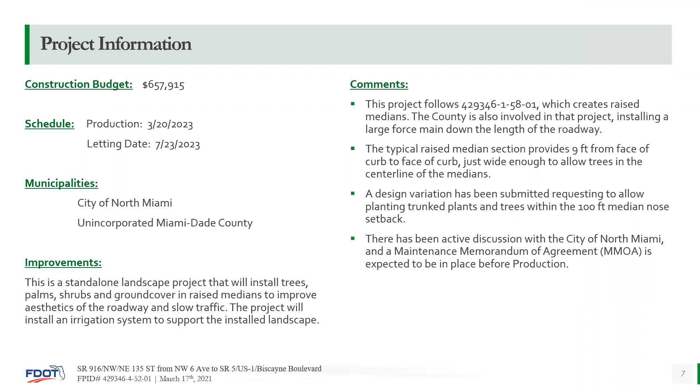The irrigation will be installed. There will be, I believe, two water taps splitting the project in half because it's about 3 miles long, but it'll be handled with one controller.

Kevin had already mentioned the force main project that's preceding this one. The median sections are only about 9 feet wide, so we won't be able to get extra large shade trees in there, but there will be medium-sized trees and palms dotting the whole project.

Typically, the standards don't allow for trees within 100 feet of the beginning of the medians. We have requested a variation from that design standard to be able to plant to the max, and that seems to be going through without any hiccups. It has not been approved yet, but there are no anticipated issues that would stop it.

As we mentioned, there is an MMOA currently in process of being executed to maintain the landscape and the irrigation. You want to go to the next slide?

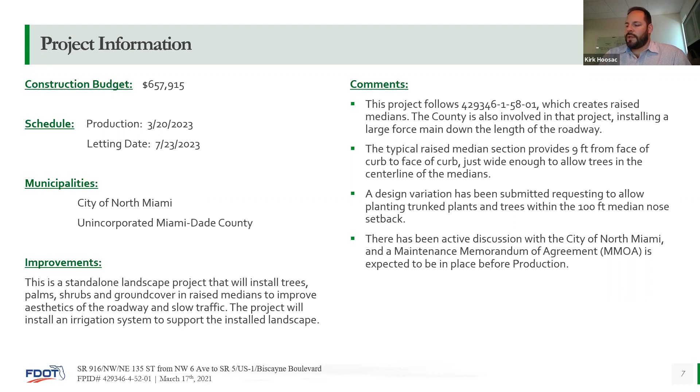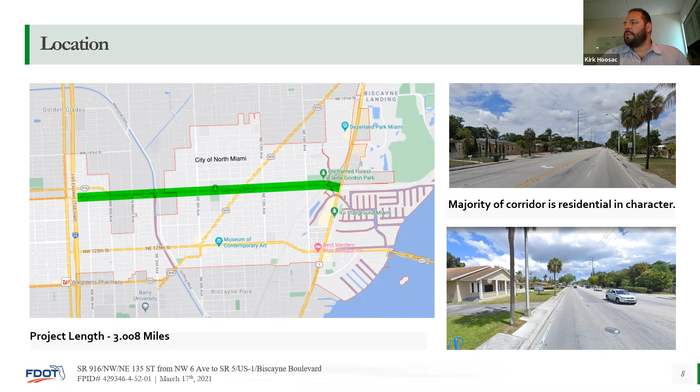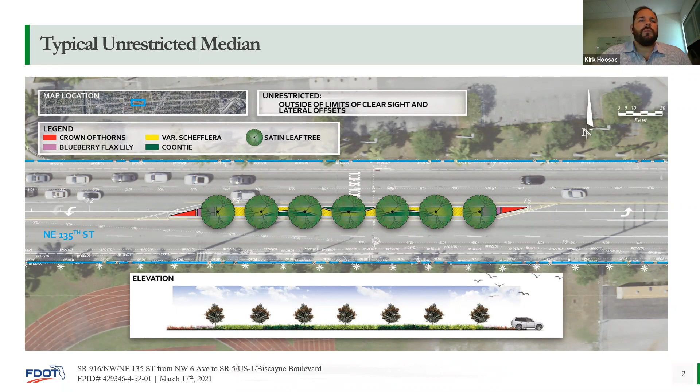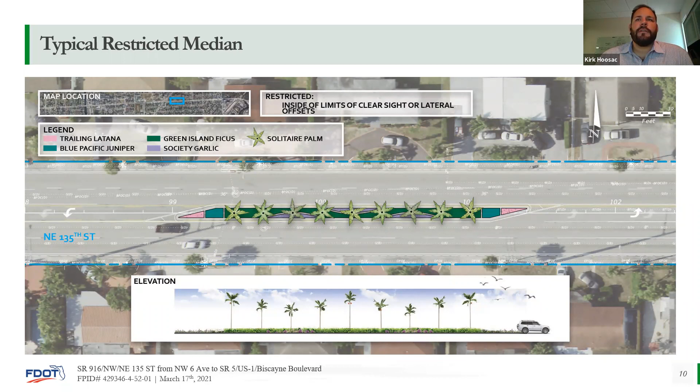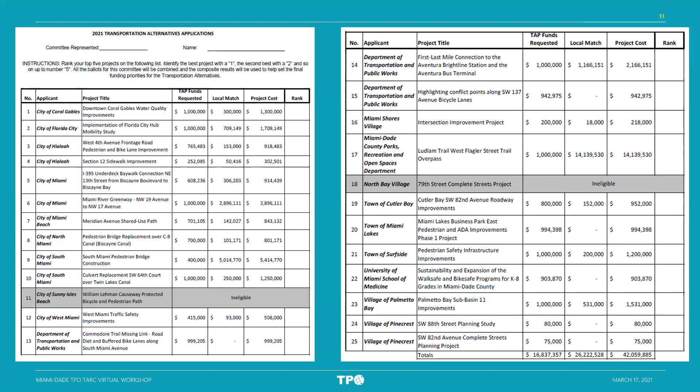So Oscar, is it in your hands, or who's handling this one? Yes, I'll go ahead and take it from here. Thank you, Alex. Okay, yeah, we received 25 applications.

I think last year we only received 12. Ironically, unfortunately though, this program is discretionary for FDOT. And as most of you are well aware, the gas taxes have gone down substantially, combined with less driving and more efficient fuel cars. Nonetheless, we have 25 applications.

Originally, 4 were deemed ineligible by FDOT. However, FHWA got involved and determined 2 of them to be re-eligible. I don't know if that's a word, I just made one up.

So what I like to do is we do this every year. As a matter of fact, last year when we did this, I think COVID had just hit, and I don't think we met in person on this one, last meeting when we did this. So we had everyone submit their rankings either by fax, by phone snapshots, or electronically.

Now that we've been in this virtual environment for some time, hopefully that's the reason why I sent it out in a spreadsheet. Unfortunately, when I sent it out earlier, it had 4 ineligible projects. I sent one out right as the meeting started that matches this on our screen. You could use either one, just in case you decide to elect one of the ones that were previously deemed ineligible - you could always write a number in the rank column in case you already had printed it out.

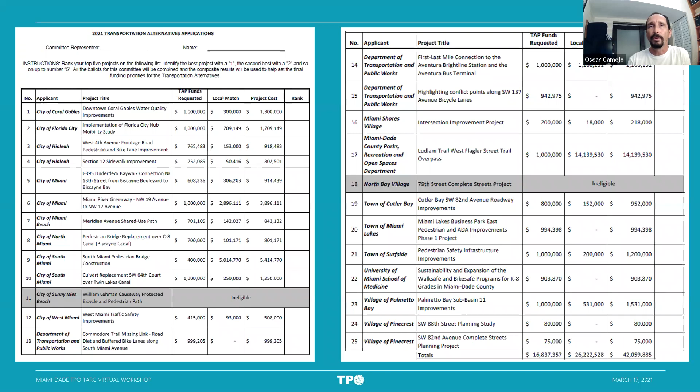Having said that, we go rank 1 through 5, 1 being the one you feel is the best, all the way through number 5. You use one number once. And we're going to go through Google Earth and go through each one of these. Getting ready for this meeting, we realized 5 of them do not have the Google Earth file set up, so we're going to go as best we can along these.

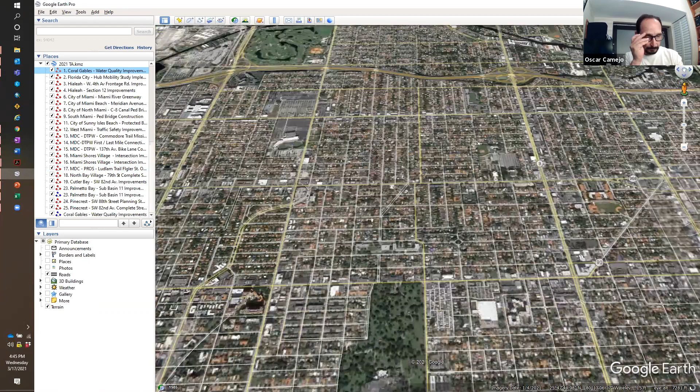So the first one is Coral Gables. They applied for what's called water quality improvements - essentially pollution prevention and abatement to waterway and Biscayne Bay as a result of roadway stormwater runoff. The existing drainage system along the corridors are part of a larger system that ultimately discharges to the Riviera waterway. So that is number 1.

What, excuse me, Oscar, why is that on this committee if it's a stormwater improvement? It's a roadway - it's a transportation alternatives application for funding, so it's not specific to an aesthetics committee or a freight committee. These are all, TARC ranks all of them regardless if they're aesthetics or not. It's part of the evaluation criteria process. But for some reason it's still eligible? Yeah, and they were deemed eligible - they submitted in time, and water quality is eligible.

Number 2 is the city of Florida City. As a matter of fact, we just completed a study for Florida City, a mobility hub study. And what they are applying for is, as a result of a study, they identified short and midterm challenges to accessibility and connectivity in the area immediately surrounding Florida City bus rapid transit system. This project will address the short-term quick fixes that can significantly enhance safe access to the station and focus on the transit core area, with priority given to improvements near schools.

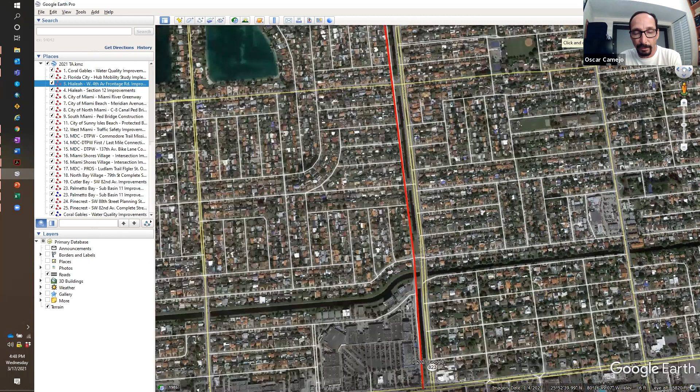West 4th Avenue frontage road pedestrian and bike lane improvement. They want to add sidewalks to the east side of West 4th Avenue along the canal and provide a bike share lane from West 49th Street to West 66th Place.

City of Hialeah has two applications. The second one is a Section 12 sidewalk improvement: add sidewalk and ADA ramps, with improvements on all corners from West 12th Avenue to West 8th Avenue and from West 32nd Street to West 37th Street. This is a sidewalk improvement effort, and they're asking for $252,000. The most you can ask for on these projects is $1 million, which most people ask for.

Applicant number 5 is City of Miami. Unfortunately we don't have that one on Google Earth. It's the I-395 underdeck Baywalk connection to Northeast 13th Street, from Biscayne Boulevard to Biscayne Bay, which connects the underdeck and Heritage Trail to the Baywalk. The City of Miami intends to expand the lease agreement with FDOT to provide the connection from the Baywalk to Northeast 13th Street. The connection will be a wide path with landscape elements to provide a safe and attractive connection to Baywalk.

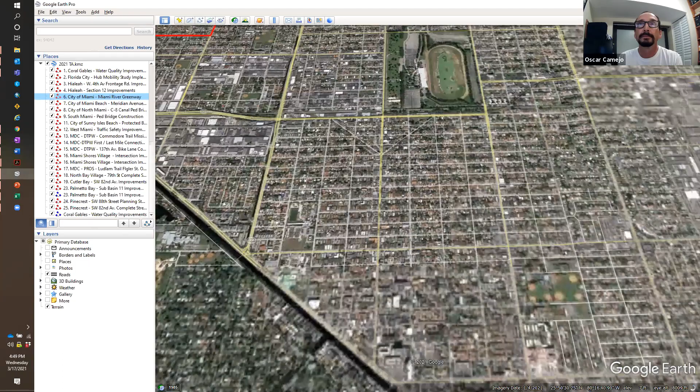Number 6 is also a City of Miami applicant. This is the Miami River Greenway, Northwest 19th Avenue to Northwest 17th Avenue, providing a publicly accessible pathway for bicyclists and pedestrians in concert with the roadway reconstruction of Northwest North River Drive. This public pedestrian and bicycle trail along the historic Miami River will connect diverse multicultural neighborhoods, public parks, residences, historical sites, businesses, and cultural attractions around the waterway. That's applicant number 6.

Now we move to applicant number 7, City of Miami Beach. This is the Meridian Avenue Shared Use Path, to enhance the bicycle and pedestrian network in Miami Beach in compliance with the adopted Bicycle Pedestrian Master Plan. The project consists of final design and construction of a 10-foot shared use path on the west side of Meridian Avenue from Dade Boulevard to 28th Street.

Applicant number 8 is City of North Miami. This is a pedestrian bridge replacement over the Biscayne Canal, replacing the existing pedestrian bridge over the South Florida Water Management District C8 Canal. The existing bridge is located between Northeast 2nd Avenue and Griffin Boulevard, approximately 1,400 feet south of the existing Northeast 135th Street vehicular bridge.

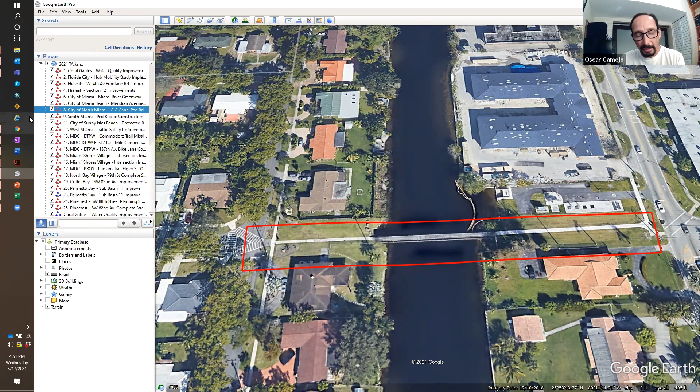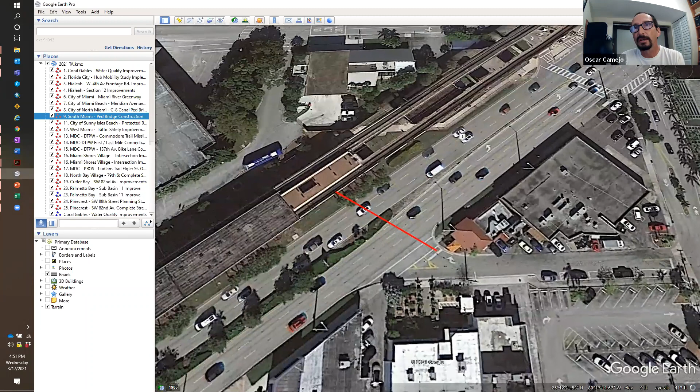Applicant number 9, City of South Miami. They've already received money before for the construction phase; I believe this is for the design of it. They're asking for $400,000 to provide a safe elevated route for non-drivers to travel between the northwest and southeast sides of the 6-lane arterial US 1 through development of a pedestrian bridge. This will connect to the old bakery, what used to be called the Bakery Center.

Applicant number 10 — unfortunately we don't have a Google Earth video — is the South Miami culvert replacement at Southwest 64th Court over Twin Lakes Canal. This will replace the structurally deficient corrugated metal pipe culvert located at Southwest 64th Court within the Twin Lakes Canal in South Miami with a new structure, providing greater connectivity between the Manor Lane neighborhood and existing Metrorail and businesses in the area, and promoting pedestrian safety. This was one of those deemed ineligible by FDOT early in the process and then reinserted as determined eligible by FHWA. That was number 10.

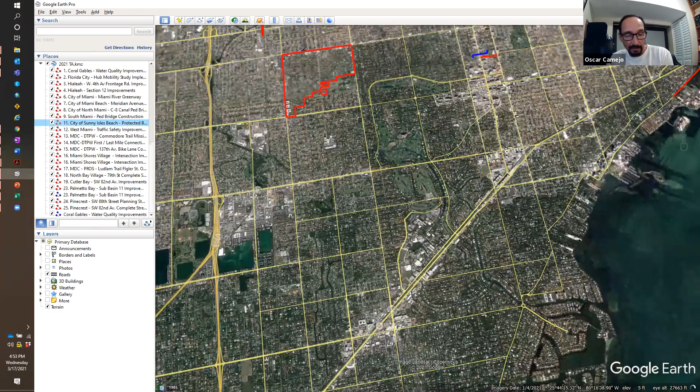Moving to applicant number 11, City of Sunny Isles Beach. This is for the William Lehman Causeway protected bicycle and pedestrian path, to improve the design and function of the bicycle lane on State Road 856, William Lehman Causeway, by expanding its use to include pedestrians and installing a protected barrier for safer connection for pedestrians and cyclists commuting between Sunny Isles Beach and Aventura. This one has been determined ineligible.

So this one you will not be ranking. FDOT determined it ineligible; in order to remove a lane it has to be approved by them beforehand. So you won't be ranking number 11. Talking to the City of Sunny Isles, FDOT is taking care of the project themselves — they're working with them, and they're the ones who determined it ineligible. They have to work with FDOT because this is a state road, 856.

Yeah, but I think Juan's saying there's money — I mean, FDOT's just going to do it, right? That's what I understood. Probably. I could ask and follow up. No, that's okay.

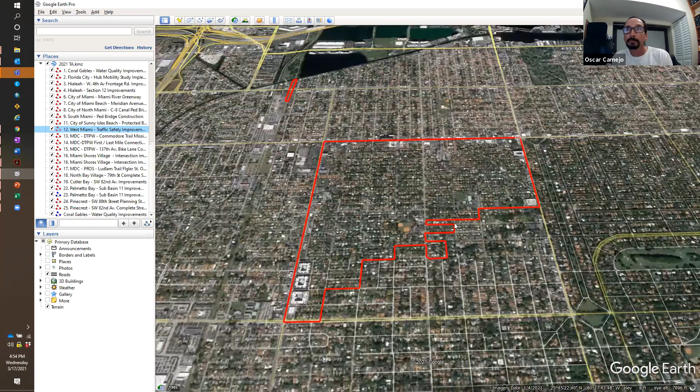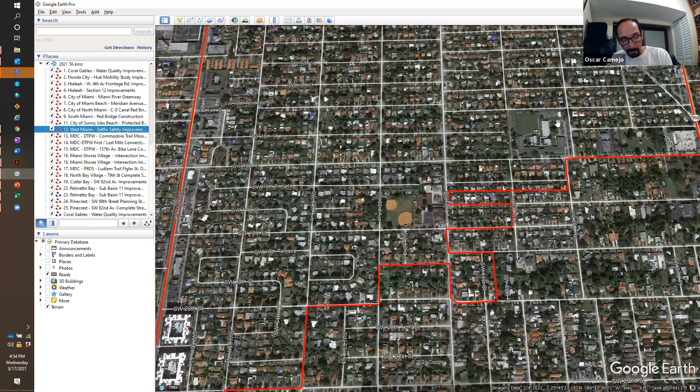Okay, this is to implement the recommendations of a Smart Move study, which assessed traffic and crash conditions in the city at various locations. The project will also improve safety to and from an elementary school by adding traffic circles and crosswalks.

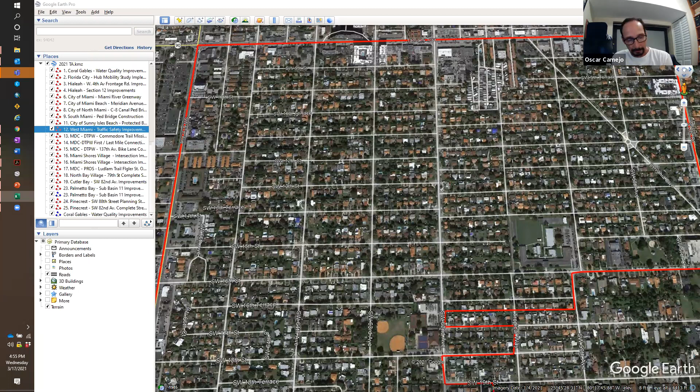Number 13 is a request from the Department of Transportation and Public Works. They actually have three applications in. This one is for the Commodore Trail missing link, road diet, and buffered lanes along South Miami Avenue to improve safety and connectivity for bicyclists that use the Commodore Trail for commuting and recreational purposes. The Commodore Trail is a highly active trail that extends from the Cocoa Plum Circle in Coral Gables to Alice Wainwright Park.

We'll go to number 14. This is another Department of Transportation and Public Works application. This is for first and last mile connection to the Aventura Brightline Station and the Aventura Bus Terminal, to provide bicycle connectivity along West Dixie Highway to the Aventura Brightline Station and the Aventura Bus Terminal. It also aims to improve bicycle travel from Oleta Park through the city of North Miami Beach to Reynolds Park and to the Miami-Dade Broward County line.

Okay, number 15 is another DTPW application, highlighting conflict points along Southwest 137th Avenue bicycle lanes. It aims to highlight conflict points along the existing bicycle lanes of Southwest 137th Avenue, from Southwest 344th Street to Waterstone Boulevard, approximately Southwest 309th Street, while improving the riding surface for cyclists and vehicles. Southwest 137th is a multi-lane road with a posted speed of 40 miles per hour.

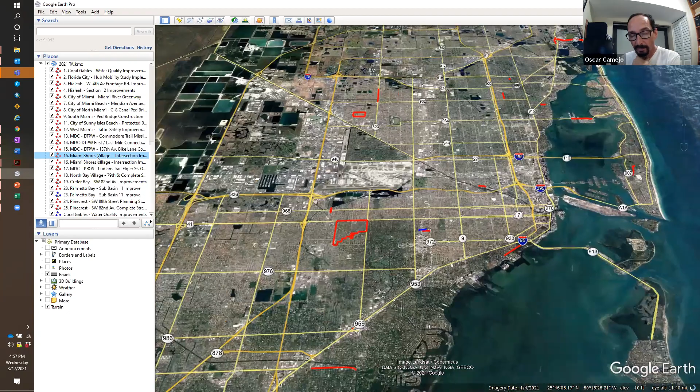Applicant number 16, Miami Shores Village. They're applying for an intersection improvement project to improve ADA compliant crosswalks along the village's local roadways, to improve pedestrian safety along two main roadways within the village that lead to local schools and a community park.

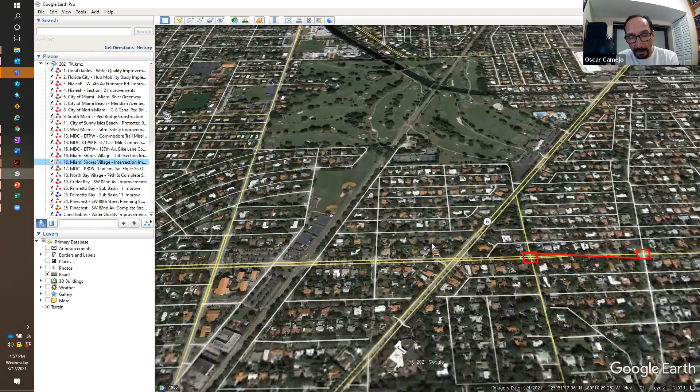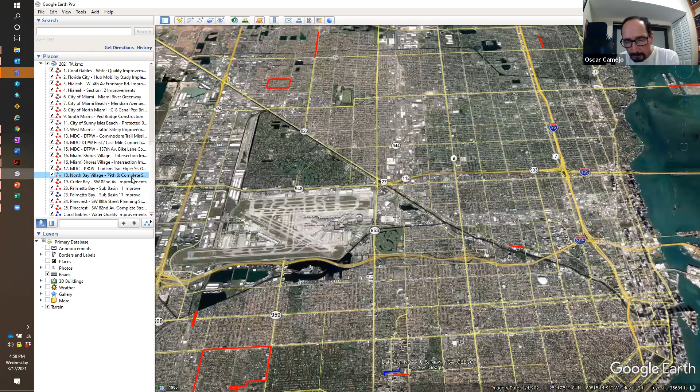North Bay Village is application number 18. This is one that was determined ineligible. This is another street lane closure or elimination, which FDOT has to approve beforehand. So you will not be ranking number 18.

Number 19 is the town of Cutler Bay. Cutler Bay Southwest 82nd Avenue roadway improvements, to implement traffic calming techniques along Southwest 82nd Avenue from Southwest 184th Street, which is their terminus, the town's perimeter, to Old Cutler Road. Planned improvements include the installation of one traffic roundabout, improved drainage as required, new sidewalks to eliminate gaps along Southwest 184th Street, ADA ramps, and painting of bicycle sharrows along the projected path.

Unfortunately, we're missing on Google Earth items application numbers 20, 21, and 22, but I'll read out loud their descriptions. Application number 20 is the town of Miami Lakes Business Park East Pedestrian and ADA Improvements Phase 1 project. Design, permit, and construct new 6-foot sidewalks and pedestrian safety related infrastructure in compliance with the Americans with Disabilities Act, to safely connect people to jobs, industries, shared use path on Northwest 139th Street from Northwest 60th Avenue to Northwest 57th Court, northward to Northwest 142nd Street, including Northwest 59th Avenue, Northwest 58th Court, Northwest 58th Avenue, and Northwest 57th Court.

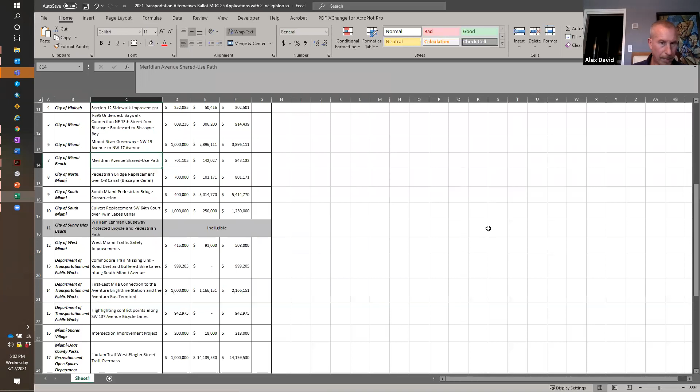Okay, thank you, Oscar. So do you want to just - I mean, almost everyone has done this before, right? I think everyone's done this. Maybe not Richard. Richard, have you? I'm not sure. Okay, maybe not Richard. Yeah, he said he's nodding yes, I believe. I did it last year. Okay, you did do it? Okay, so it's a repeat of what we've been doing for years.

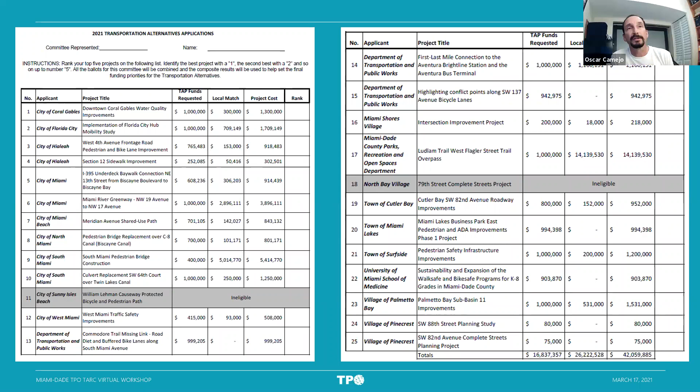So whatever that pot of money is - if it's 5 million, and there are 10 projects ranked, and the first 5 want $1 million, then only those 5 get money. The cutoff will be the money. You just subtract from 1, 2, 3, go down the list until you're out of money, because ultimately all these projects are ranked in order - a total combined ranking in the end.

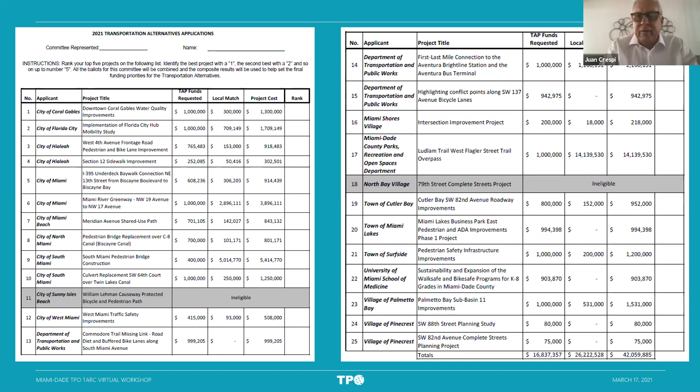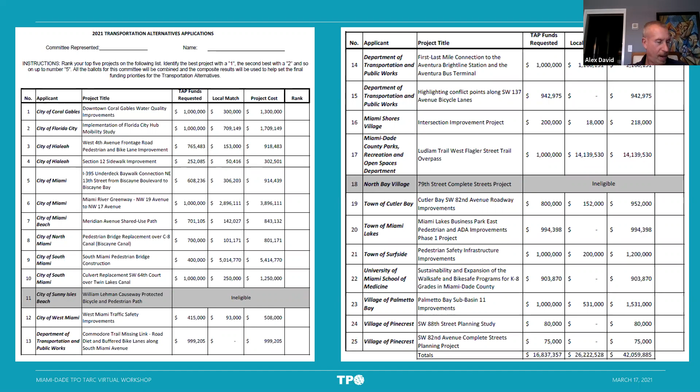So the next workshop, if we've not been ordered to go back in person yet, or if Oscar can't figure it out, our next workshop will be April 21st, in about a month. And I know Debbie had asked for some time now for Southwest 37th Avenue, the Douglas Road Station, and I'm working with DTPW - hopefully that'll be the next presentation.